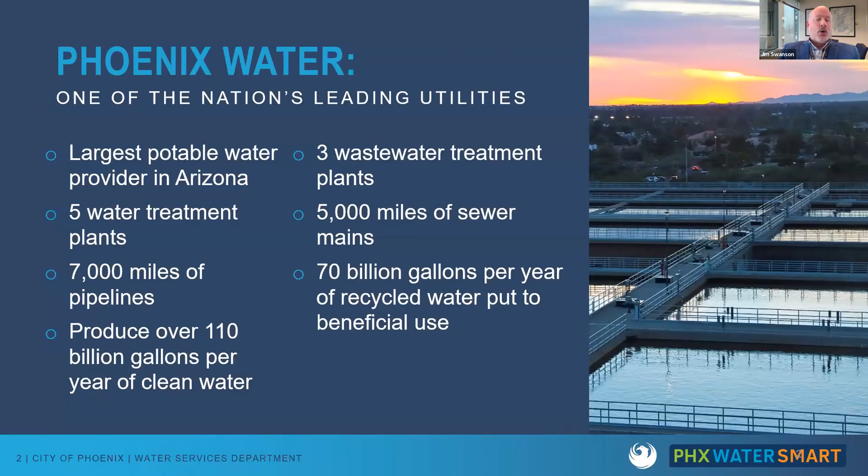We also own and operate 3 wastewater treatment plants and cover over 5,000 miles of sewer mains throughout the city to convey and collect that wastewater. We also recycle about 100% of our wastewater, delivering it for use in agriculture, energy production, urban irrigation, and wetland maintenance, making Phoenix one of the largest recycled water producers in the Southwest. Each year we produce about 70 billion gallons of recycled water that's put to beneficial use in the agricultural sector and in the energy production sector.

To ensure that we're providing safe, reliable, and affordable water services, the department employs over about 1,400 people. We have biologists, chemists, and laboratory technicians who conduct over 1 million water quality tests annually to ensure regulatory compliance with over 100 regulatory and water quality standards. We also have 45 engineers and project managers dedicated to ensuring that our existing infrastructure, as it ages, is rehabilitated and replaced. And we can't forget the teams of electricians, mechanics, instrumentation technicians, and certified operators who make sure every day that water services are ready at your tap when you want it.

So when we talk about water in the desert, it's made possible through thoughtful planning and formal agreements to access our surface water supplies. On average, approximately 98% of the water we deliver to our customers is surface water from the Salt, Verde, and Colorado rivers, and about 2% is from groundwater.

Now, with that said, in August 2021 the U.S. Secretary of the Interior declared a Tier 1 shortage on the Colorado River. In response to that declaration, the city of Phoenix declared a Stage 1 drought in June of 2022. This is important because as the new operating guidelines for the Colorado River are developed over the next couple of years, it'll be important that we have responses if there are shortages to that Colorado River water supply. We'll talk about what some of those solutions are in a moment.

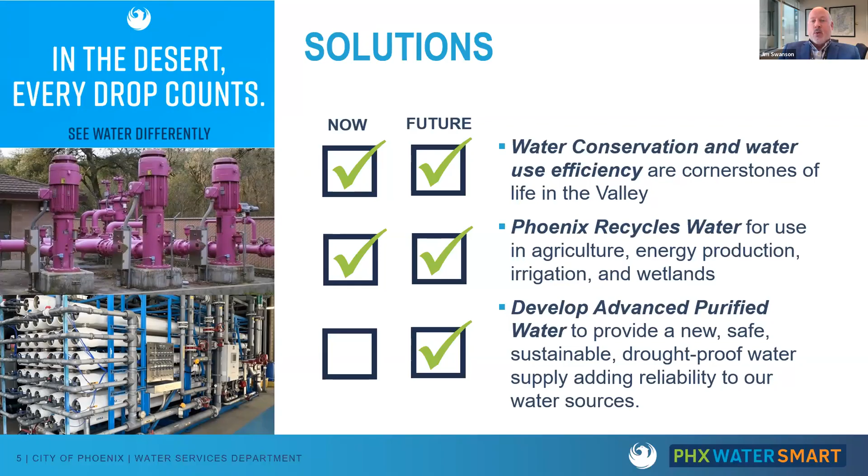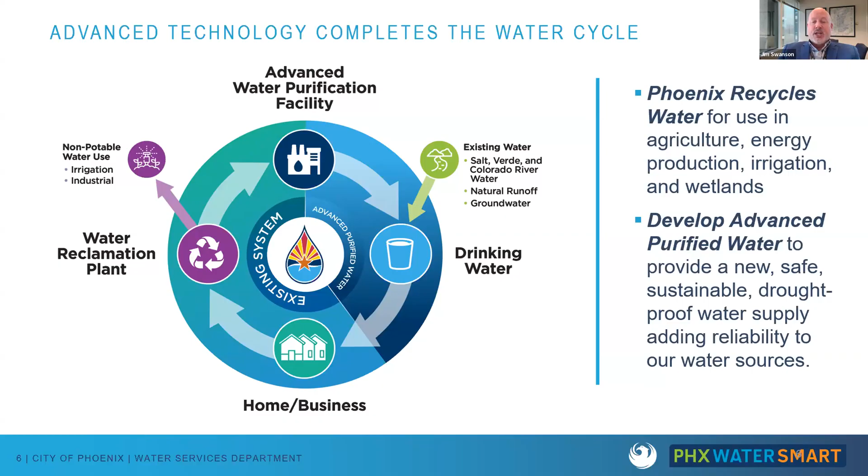Today, that water cycle is incomplete, but with the implementation of advanced water purification, it will complete that water cycle. So we'll talk a little bit about what AWP is. So what is advanced water purification?

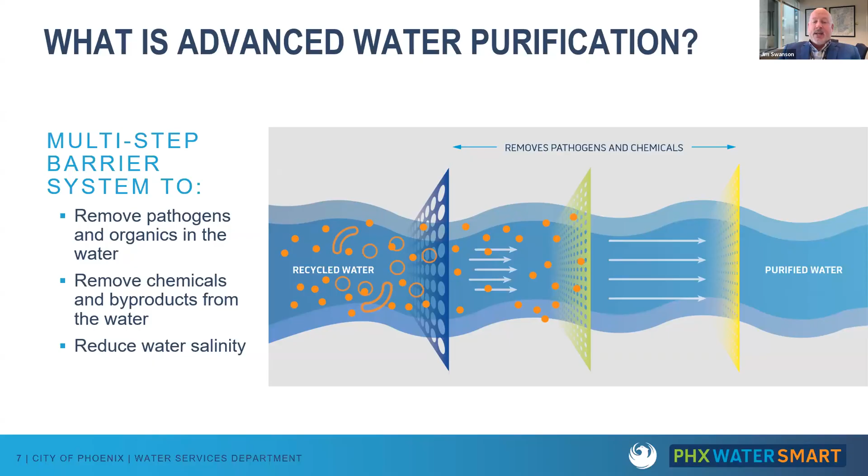It is a proven and safe cleaning process that provides a renewable, drought-resilient source of water. Starting from recycled water that comes from our water reclamation plants, we implement proven technologies in a multi-barrier process to produce water that will exceed current drinking water standards. The process will remove pathogens, microscopic organic material, chemicals, pharmaceuticals, and chemical byproducts. It'll reduce water salinity for improved water quality. The final product is purified water ready to be added to the existing drinking water supplies the city has today.

I want to talk about a couple of things on this slide. Advanced water purification is the next evolution of water treatment. It marries or combines multiple existing technologies together to produce advanced purified water. The technology isn't new — this is not a technology challenge, it's a perception challenge. It's, however, the first time we're going to be combining all of these technologies into a single water treatment plant.

For example, today at our City of Phoenix Lake Pleasant Water Treatment Plant, we've been using GAC, granular activated carbon, and ultraviolet light to treat Colorado River water for the last 18 years. One of the treatment plants I previously worked at prior to the City of Phoenix has been using MBR, membrane bioreactors, and UV for the last 15 years.

So when we talk about the mechanical and chemical barriers — the use of UV to inactivate pathogens and advanced oxidants to break down chemicals — you can see that in the UVAOP, the ultraviolet advanced oxidation process. In that process, we're using ultraviolet light to inactivate pathogens, but we're also using oxidants such as chlorine or hydrogen peroxide, which create free radicals that then break apart chemical bonds.

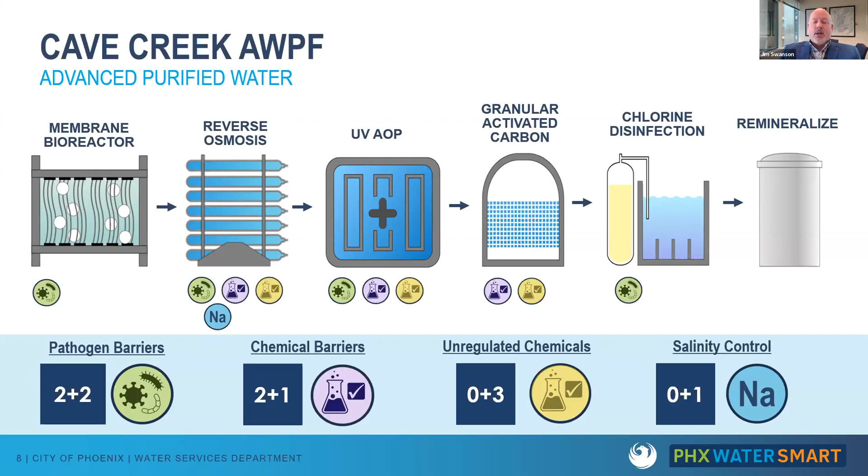For the City of Phoenix, that reverse osmosis process will be targeting chemicals and molecules larger than 5 atoms wide. Essentially, if something is 5 atoms wide, the RO will reject that water. Less than 5 atoms wide, roughly, that will pass through the RO and become our future drinking water. A water molecule, for reference, is about 3 atoms in size. So we'll be using all of these technologies — physical barriers and chemical barriers — to treat this water.

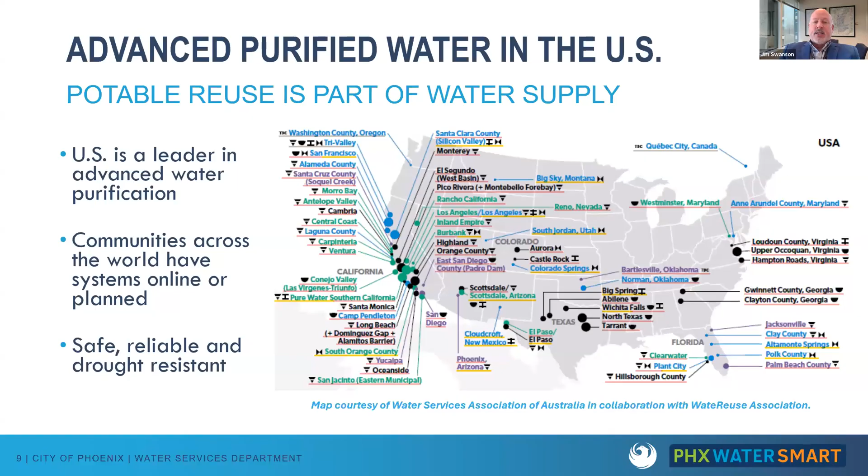In Colorado, the city of Aurora, a suburb of Denver, has been using advanced purified water as part of their water supply since about 2010. And there are more communities every day at various stages of planning, design, and operation of these advanced water purification facilities.

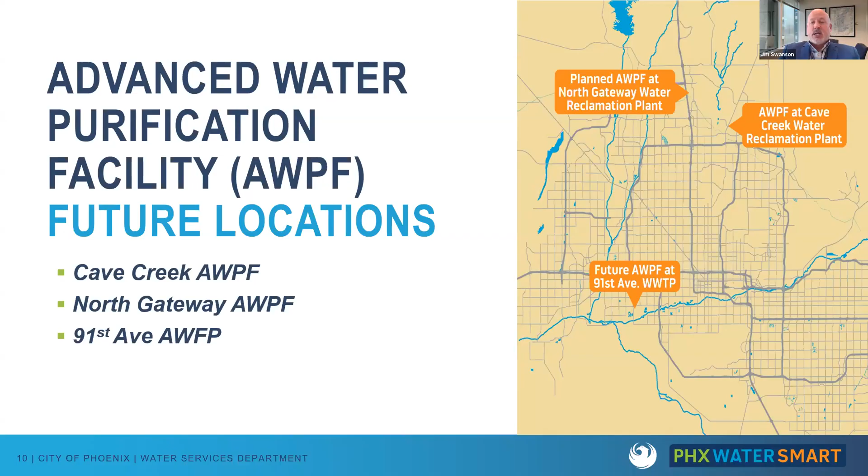And then our third facility that we're looking at will be 91st Avenue, which will be a regional facility, and it'll serve the southwest portion of the city. So when we start talking about specifics, we'll talk about the Cave Creek facility first.

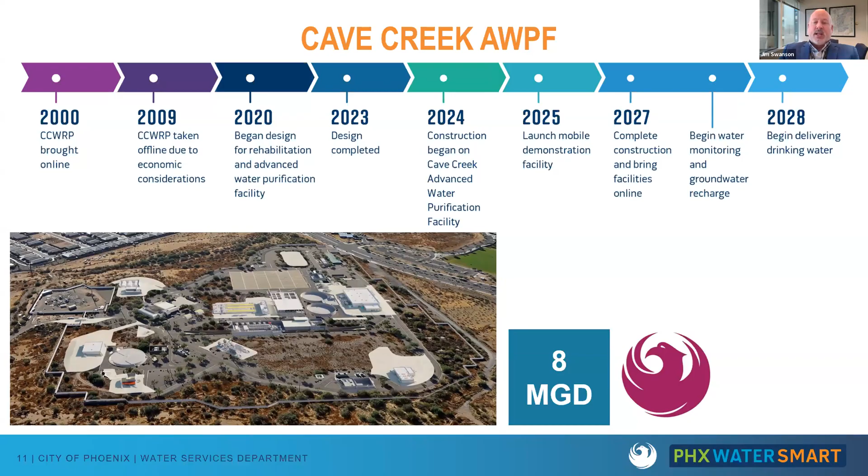As I said earlier, this is one of our first facilities, and it'll be looking to be in operations in 2028. We are currently under construction. The facility will be about 8 MGD in size. That's roughly about 25,000 homes that will be receiving advanced purified water, or what we're branding as Pure Water Phoenix. And that facility will be a City of Phoenix facility only.

As we look at our next facility, that will be the North Gateway Advanced Water Purification Facility. It also is going to be about an 8 MGD facility, again serving 25,000 homes. It'll be a Phoenix-only plant serving the northwest part of the city, and we are looking to have that facility come online in 2031 for direct use.

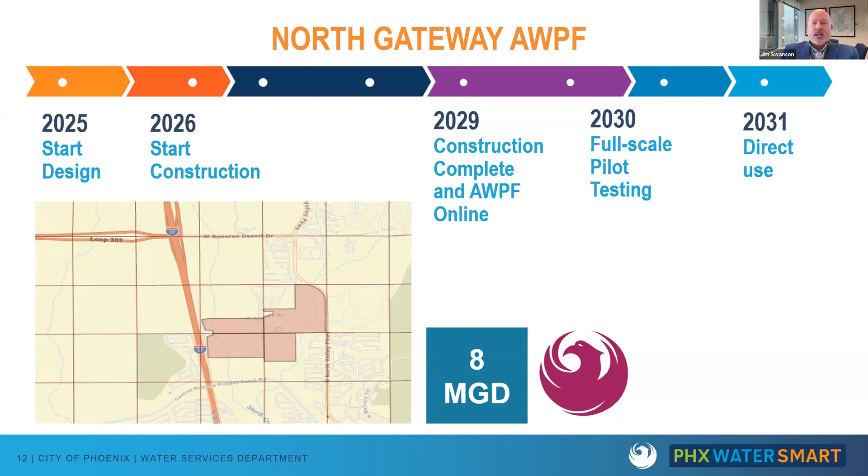But prior to that, in 2030, once the construction is complete, what we'll be doing for the first year of operations is taking that water and augmenting our groundwater supplies. And then we'll be collecting all of our data for our pilot facility, submitting that to the state. And then once approved by the state, it'll go to direct use in 2031.

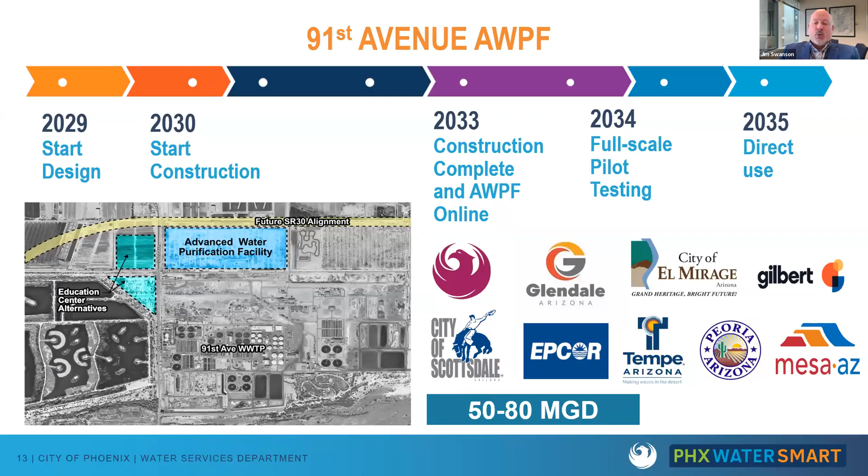This is going to be one of our regional facilities - the 91st Avenue facility, where we are focused on developing a regional AWPF partnership. You can see on the screen that there are multiple cities: Phoenix, Glendale, Scottsdale, and others. As part of this effort, we'll be evaluating, conducting feasibility studies, looking into state and federal funding opportunities. Currently, we are preparing for future activities, which include the start of design in 2029, the start of construction in 2030, and then direct reuse in 2035.

So when we think of advanced purified water, the real challenge is everyone understanding what it is and what it isn't. Today, under the Federal Safe Drinking Water Act, every water treatment plant has to meet those requirements. Arizona just recently passed an additional set of rules, which is going to have additional requirements for treating recycled water to turn that into drinking water. So when you look at these two sets of rules, you have what we call the Federal Safe Drinking Water Act plus the Arizona Advanced Water Purification rules.

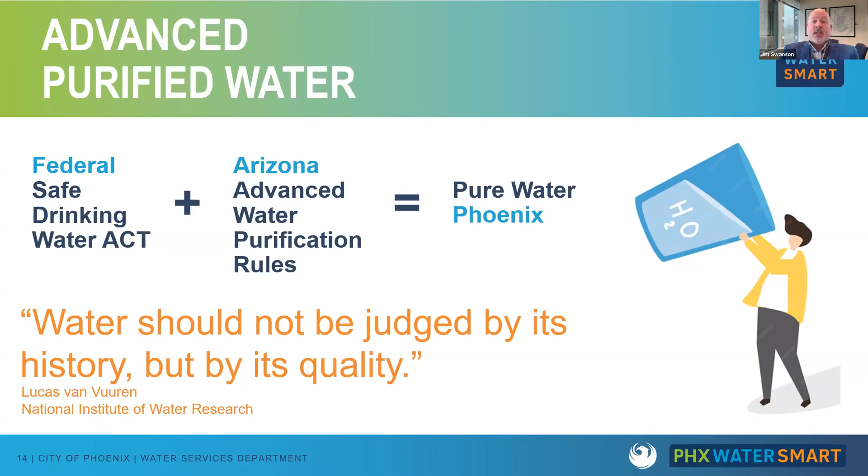Those two things are going to equal Pure Water Phoenix. So again, we're going to be providing water that not only exceeds the Safe Drinking Water Act, but also the additional Arizona rules for water purification. One of the things we like to say is, please, water should not be judged by its history, but by its quality. We want to make sure everyone understands that. At the end of the day, this is going to be some of the highest quality water that the City of Phoenix will be delivering to our customers.

So where are we going? What's our roadmap? As we look at where we are now, we will continue with our public outreach efforts. We will continue to strategize for additional state and federal funding opportunities. As I stated earlier, we are on schedule for completion of the Cave Creek AWPF in the fall of 2027 and direct use of purified water in 2028. We will continue with 91st Avenue AWPF feasibility studies and remain focused on developing our regional partnerships.

As we look to the future, we're going to be launching an advanced water purification mobile demonstration trailer later this fall. That'll give people the opportunity, as we go to their neighborhoods, to see, taste, smell, and touch the water. We'll also be designing the North Gateway facility later this year. All of these activities will ultimately lead to the development of advanced purified water that will support the water goals and needs of Phoenix, providing a sustainable and drought-resistant water supply.

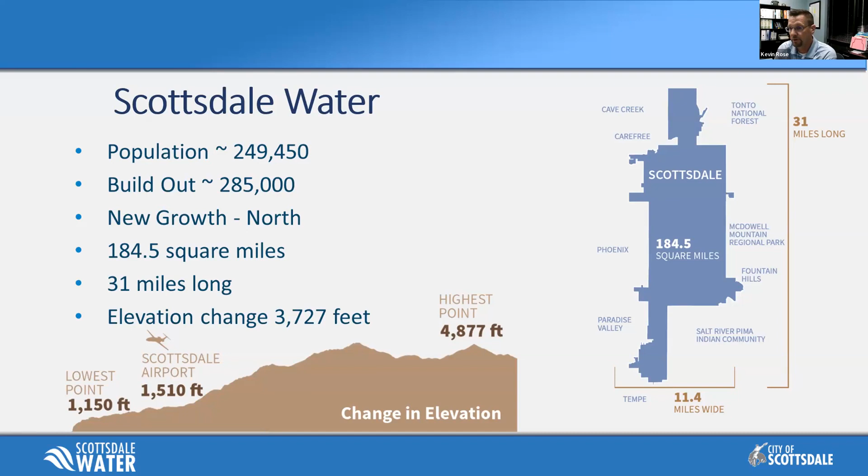Scottsdale Water, one thing we always say, we're about a 250,000 medium-sized city. A lot of our growth is towards the north, and as you can see in this slide, the elevation change is a big impact for us. We pump a lot of our water, whether it's groundwater or CAP water, up north.

We have about 94,000 water accounts, mostly single residence family. During summertime, our peak demand is right around 94 million gallons a day for the whole system. We average about 67 million gallons a day of water deliveries, all the way up to our desert mountain area, which is almost 5,000 feet, down to the southern portion, which is about 1,200 feet.

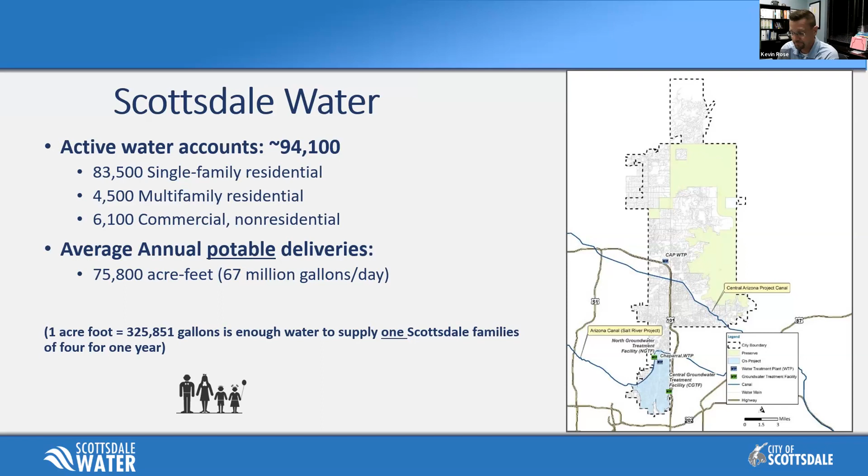The drought is a big concern. As you can see with our water deliveries, we use a lot of Colorado River water - 70% of our water is Colorado water. The other portion is Salt River; we have a small service area of SRP water. Then also our groundwater - we use our wells from time to time for two reasons.

Peak demand during the summertime and also during our winter shutdowns, we do bring down the plants for maintenance. We have two surface water plants, one on the CAP side and one on the SRP side.

But the one thing that we're really known for here in Scottsdale is our reclaimed water, where we take that water, clean it up to drinking water standards, and either recharge it into the aquifer or deliver it to our customers on the golf courses.

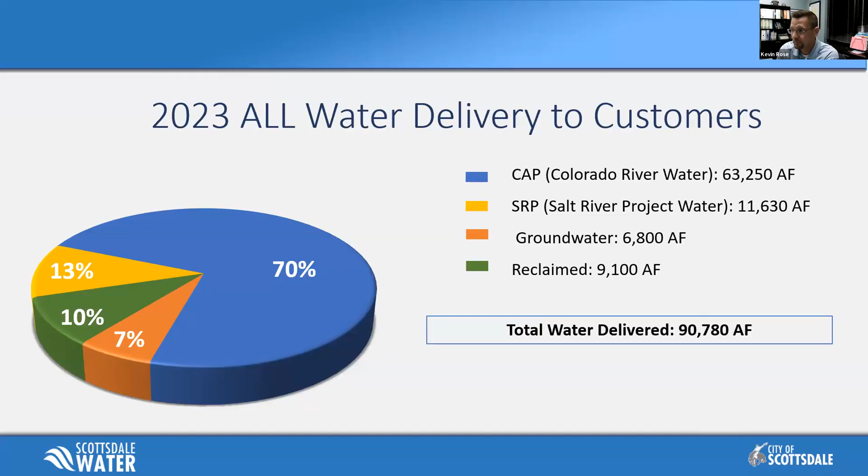The other thing that we're thinking about is how we're going to deliver the water. Scenarios we're looking at include what is our peak demand in the summertime, do we use recycled water more in the summertime or the wintertime, just to meet the customer's demand as drought becomes more imminent.

So a little bit on the water campus itself. The reclamation side, we can treat up to 24 million gallons a day, and we average about 15 million gallons a day of wastewater coming in, and we clean it to a Class A effluent.

In our advanced water treatment plant, it's the membranes - we use ultrafiltration and RO to clean the water. We either send that to the golf courses as we're getting ready for summertime, which is peak demand, or during the wintertime, that's our optimal time to start the recharge.

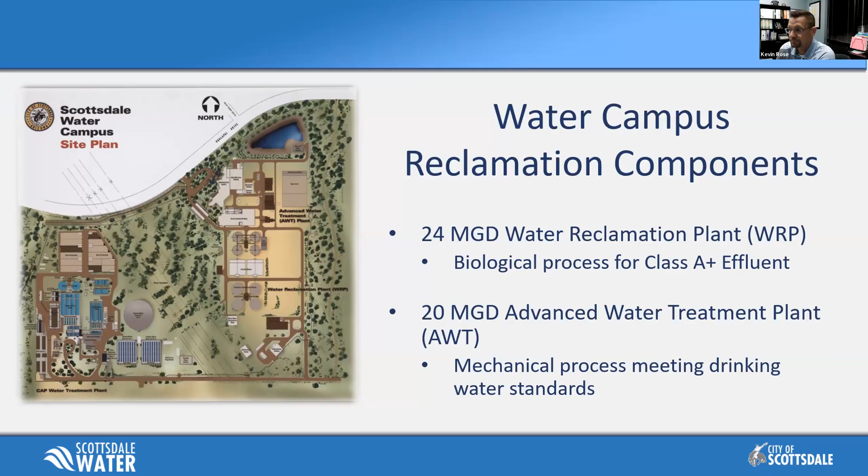We do off-site recharge, but we try to minimize that because we want to be able during drought scenarios to start using our wells to mine the water to meet customer demands. It's not easy, because at times during wintertime as we're recharging, we have to send it off-site just because everything is at capacity.

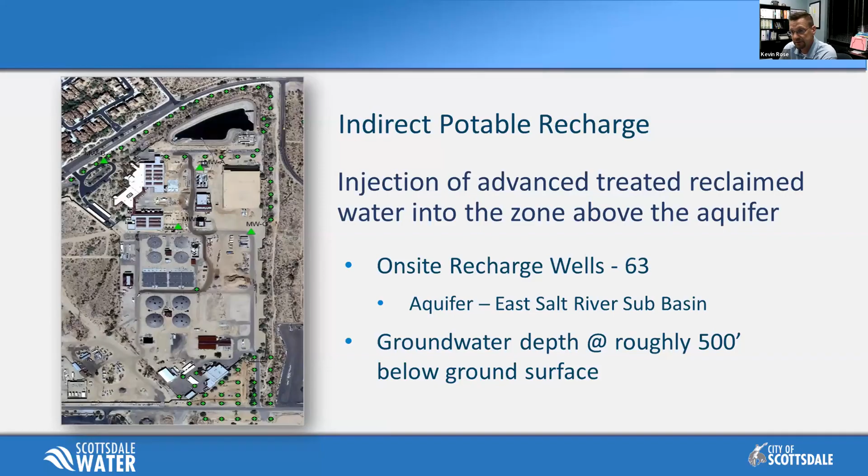One thing we tout here in Scottsdale is that we were Arizona's first to be permitted for serving recycled water, a demonstration only, up to 1,500 customers from 2019. As Jim pointed out earlier, the process itself has been around—it's the X factor we're trying to get over. During our academies, we'd serve it, and it took a while. Some people were nervous about drinking the water, but when they drank it, they said, wow, this is great tasting water.

The other thing we're really proud of is the regional partnership going on locally. Phoenix is taking the lead on a regional plant at 91st, and we're part of that study. We're thankful for them taking that lead because it's not an easy task. We know from a utility perspective, it's not just one utility, it's got to be all of us working together. We meet regularly with Tucson and Phoenix to go over the challenges with advanced water purification.

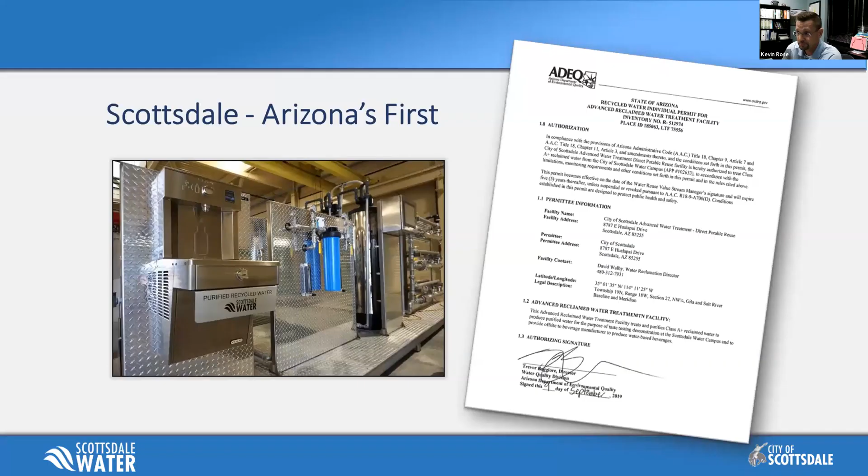So next steps for Scottsdale Water: we're looking to start our design for the pilot in August 2025. We've got some preliminary designs for our demonstration. One thing we're noticing is that recruiting advanced water treatment operators is going to be a major challenge. We need operators who understand the operation, but also understand water and wastewater treatment. There's a shortage of operators, and we're all doing what we can to incentivize individuals to get into the industry through high schools, community colleges, and trade schools, while also letting them know what a great career water treatment offers.

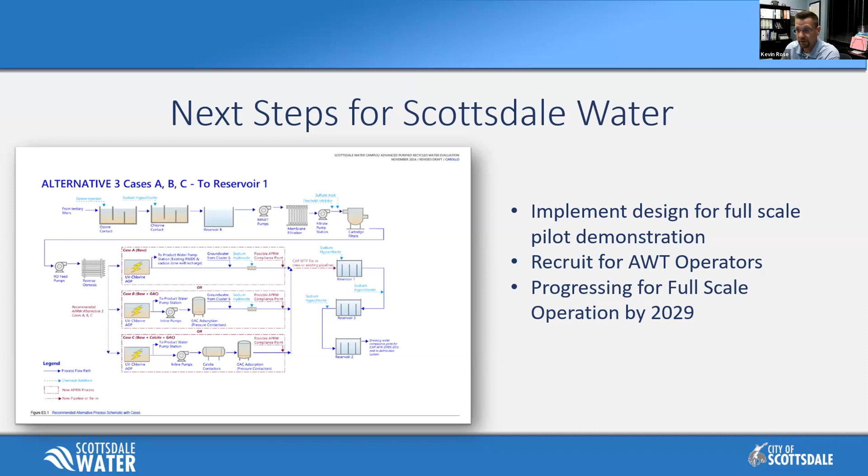So some more on the staffing challenges. Again, there's a shortage of trained and qualified operators, plus certification requirements. Many of our surface water plants are grade 4 water treatment plants, and on the reclamation side, they're grade 4 wastewater treatment plants. Finding those grade 4 operators is tough, and there's going to be additional certification requirements and testing expected for advanced water treatment. There are also items where we need a direct responsible in charge on each shift, which is different from what we have now on the water and wastewater sides.

As we implement this new rule, finalized in March this year, getting accustomed to it brings up a lot more questions. We're thankful for ADEQ's collaboration as we work through this—it's becoming a challenge, but I think the industry as a whole, locally and statewide, is up to it. So with that, that's my last slide.

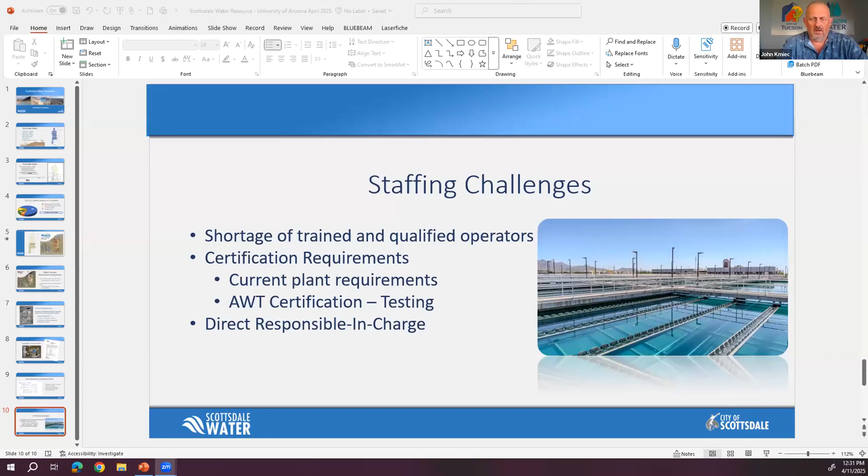Good afternoon, everyone, thank you all for joining. Last time I looked, it looked like we were close to 150 people, which is fantastic. So Tucson is kind of new to this—we had a discussion from Jim from Phoenix, and then Kevin from Scottsdale, about their programs. They've been thinking about it for several years, but the Tucson program is brand new; we're dipping our toe into this as well.

So many of you might be asking, why Tucson? Why are they moving forward with advanced water purification? That's going to be the point of my presentation going forward. As a reminder, City of Tucson and Tucson Water serve about 750,000 customers. Many of those customers are in the City of Tucson, but about 30% are actually located outside of Tucson—whether it's the town of Marana, the eastern and southern parts of Marana, many unincorporated parts of Pima County, a little bit in Oro Valley, and the whole community of South Tucson, among other places.

We're one of the country's largest groundwater systems. But I put an asterisk on that, because many of you know we also use Colorado River water. However, we don't use it like many of the other cities along the Central Arizona Project do—we turn it into groundwater, so we can still claim that we are a groundwater system. So let's look at some of the history of Tucson—let me get my slide to advance here.

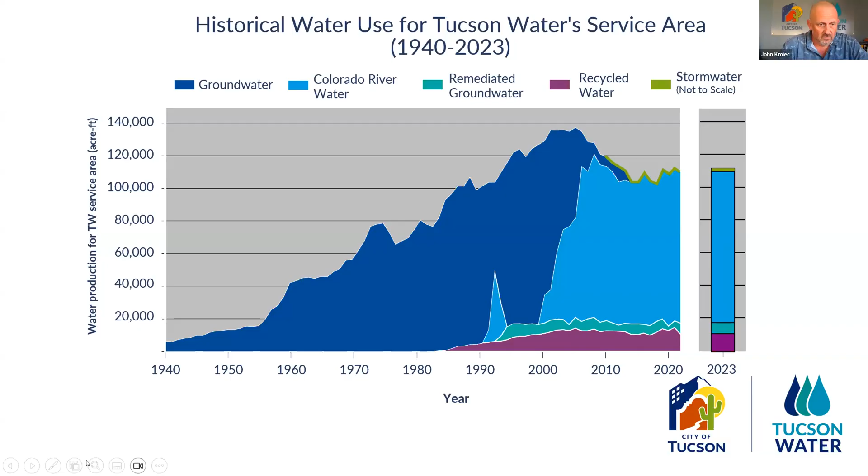So why is Tucson getting into the advanced water purification business? Well, we had an opportunity, and we are not in a crisis. So we're taking advantage of that.

Part of that opportunity relates to system conservation efforts for the Colorado River. Now that we are very much dependent on the Colorado River for our base supply going forward, we know the strains on the Colorado. Tucson holds the largest municipal contract inside the state of Arizona, at 144,191 acre feet of contract water per year we can order, so we have that dependency on the Colorado, and we know the whole Colorado is changing. So, the opportunity here—during the first bucket, affectionately called that, under the Bureau of Reclamation System Conservation Program—the city of Tucson decided to turn back a total of 110,000 acre feet of Colorado River water, left it on the river, and used the cash exchanged for that to help us with infrastructure projects: making our CAP facilities more reliable and resilient, additional infrastructure upgrades to help the water supply in the Tucson area, and including several water quality projects.

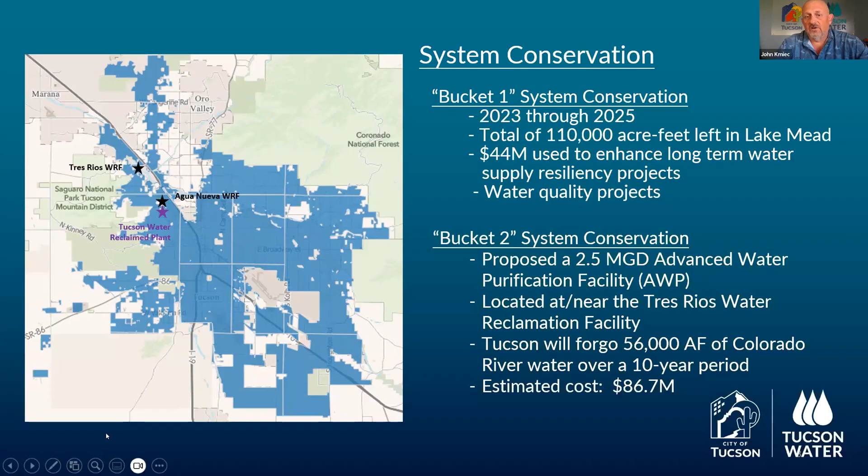But where advanced water purification came into Tucson's picture was under bucket 2. We proposed a 2.5 MGD advanced water purification plant, located near our wastewater provider, the regional wastewater provider of Pima County Wastewater Reclamation, which has a facility at Tres Rios, near Ina and I-10.

In exchange, we're going to leave about 56,000 acre feet of water over a 10-year period on the Colorado River. From that, the Bureau of Reclamation is paying for our advanced water purification plant, estimated at $86.7 million for that 2.5 MGD facility.

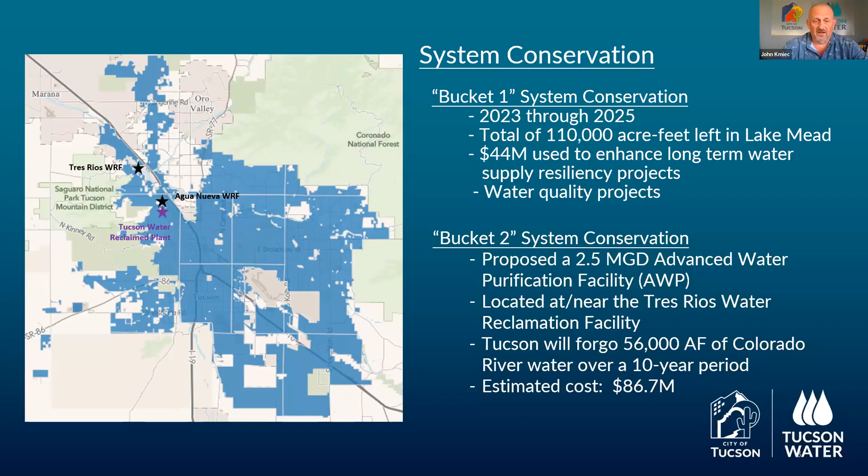The opportunity to take advantage of this came from an ethic we have in Tucson, from our community, to diversify our water portfolio whenever an opportunity arises, so we don't have to do water resource planning in the future under a crisis scenario. This opportunity arose, and we decided to take advantage of it, and that's where we're at today.

Another reason why this is important for Tucson: we have water quality challenges. We've lost well capacity, particularly on the northwest side of our service area, due to PFAS contamination and 1,4-dioxane contamination in the aquifer, which is highly impacted in many areas.

We currently have nearly 40 wells that we've lost over the last several years because of impacts of emerging contaminants like PFAS. We're currently designing a treatment plant to recover 3.7 MGD of wells that were shut off on the northwest side, impacted by PFAS and 1,4-dioxane, to bring that capacity back online.

The cost for that treatment plant alone, using some bipartisan infrastructure monies moved through our state WIFA, is nearly $34 million to build.

So when we started looking at what it would take to do wellhead treatment on a lot of our lost groundwater capacity, we compared that to just having centralized treatment for advanced water purification, so maybe we don't have to go to these impacted areas of the aquifer to do these combined wellhead treatment programs, which are incredibly expensive as well.

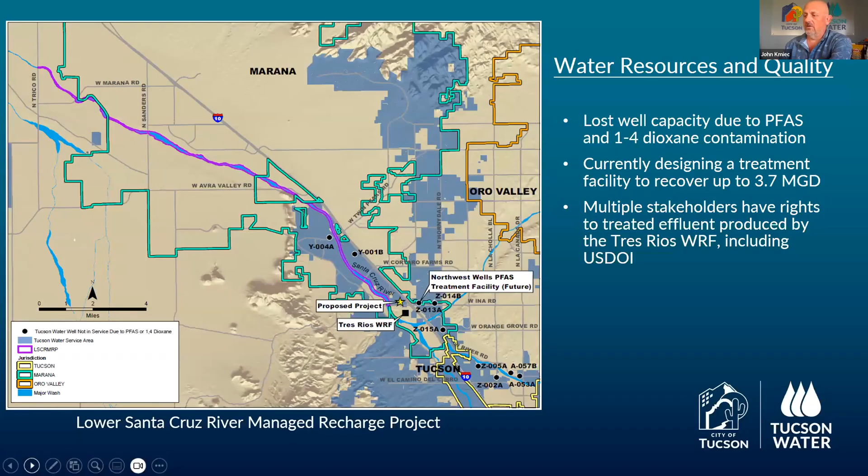So by building an advanced water purification project, we're hoping to retain some of that water that has been lost, not only to the city of Tucson, but all of our partners, including the Bureau of Rec and the other providers. So what does that look like?

And in 2021, almost 20,000 acre feet of effluent entitlement in the Tucson area, not just the cities but the bureaus and a lot of other people, was lost past that Trico stream gauge and lost into the fields and the cow pastures in southern Pinal County, and not appropriated to us anymore. So having an advanced water purification plant that can scalp some of that water back would help get it back into the urban water cycle and more local control for that.

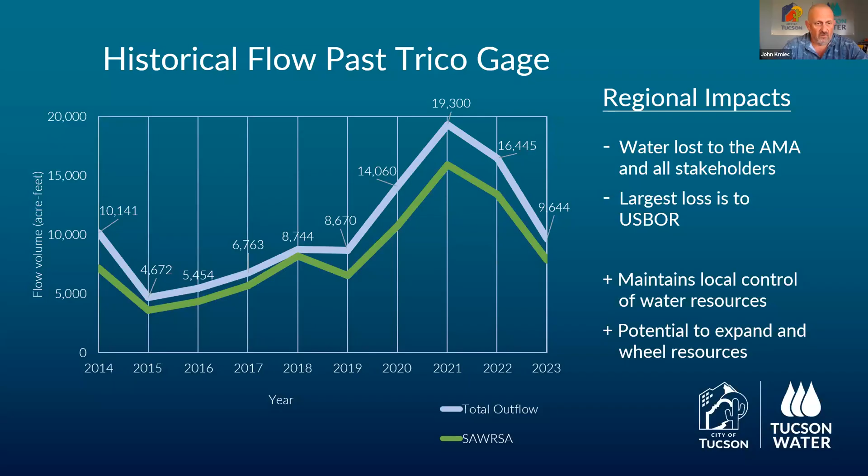So some of those projects and how we see it and how we pitched it to the Bureau is a portfolio diversification. Not only do we have our historic groundwater, we have our Colorado River entitlement, which we know and expect it to change post 2026. We have our traditional effluent uses, which is in our recycled water supply, but we're looking at that portfolio diversification for the drinking water side by bringing in advanced water purification into the mix. Economic development, also making sure that as part of having that diversification, we're setting ourselves up for the future.

This is only a 2.5 MGD plant. Our current demand on average is just under 100, or around 100 MGD a day in the Tucson water system. So we're only looking at somewhere that can fluctuate between winter and summer - somewhere between 2 to 5% of our total daily demand would even be met with advanced purified water with this small scale plant.

System losses. Now I explained that water resources are lost through the community by leaving the managed recharge project in the Lower Santa Cruz, and then reduce dependency on going back to groundwater itself, which our groundwater is impacted, and any of those things that might require additional treatment efforts to be able to bring back as a source.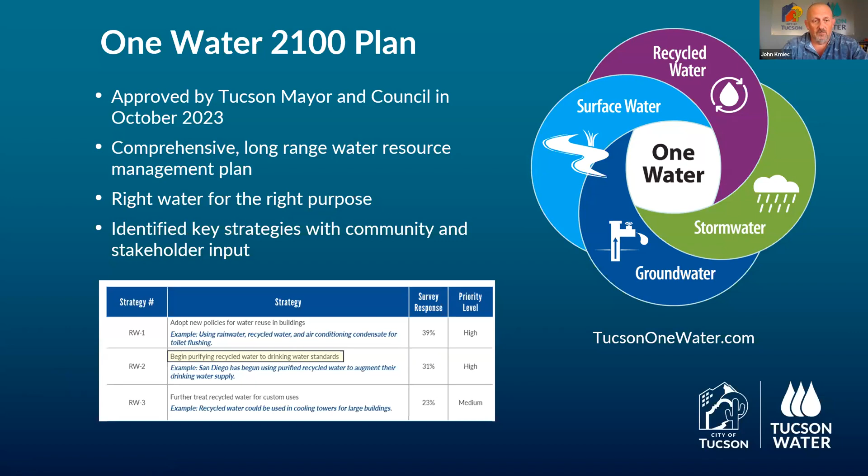And the community realized the loss of water resources that is currently occurring from our recycled water program, and they gave us essentially a guiding light and direction that we can, if the opportunity arises, begin purifying recycled water to drinking water standards.

So where we're at to date, because I know we have a lot of questions - since this is kind of new for us, we're the next one to jump on the bandwagon here. The Bucket 2 proposals were submitted to the Bureau in 2023, and then we didn't hear much for a long time. But then they finally came back and they said they liked our proposal, and so it was just approved to move forward with this system conservation plan to get funding to build our advanced water purification plant on January 7th. CAP Board of Directors then approved the subcontract exchange with the federal government.

And by January 15th of 2025, we had the Bureau of Reclamation signing event down here in Tucson to celebrate this new endeavor.

This is a partnership between the Bureau of Reclamation and the city of Tucson to get this done. We're at the first phases of our site evaluations, actively working with Pima County Wastewater Reclamation to identify a place that makes sense, both from an engineering and economic standpoint, near the Tres Rios facility, where the city of Tucson can stand up this facility. We're looking at our historic water quality data and starting to look at our source water data, which is all required as part of the rule.

We're starting our branding campaign, in collaboration and cooperation with the city of Phoenix and others. It'll be known locally here as Pure Water Tucson, which will describe not only this 2.5 MGD plant, but also our demonstration facility that we plan on building at our Sweetwater Reclaimed Water campus, where we have a building we're going to convert into a public amenity for demonstrating low volume advanced water purification.